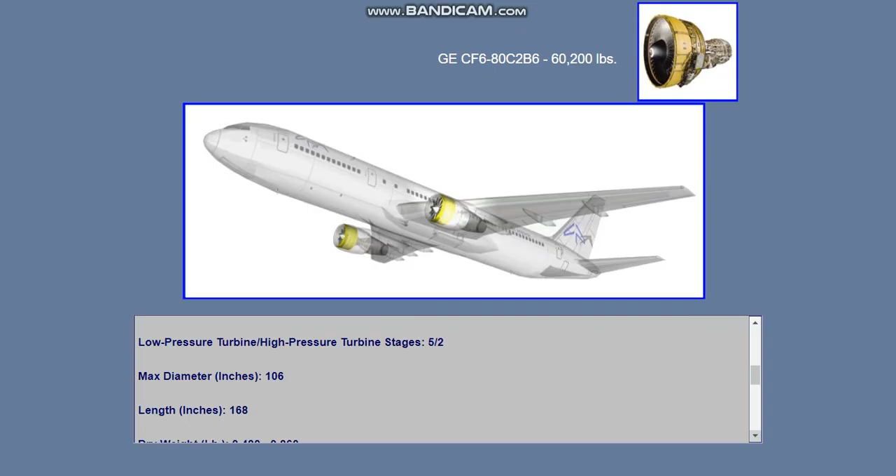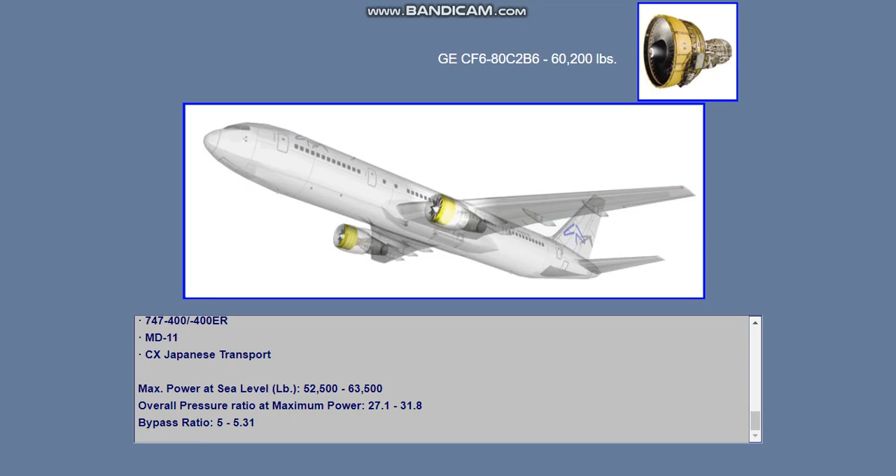The engines are dual-rotor axial flow turbofans of high compression and bypass ratio. The rotor assemblies, N1 and N2, are mounted on concentric shafts. The N1 consists of the fan and a low-pressure compressor and turbine section on a common shaft. The N2 consists of the high-pressure compressor and turbine section on a common shaft.

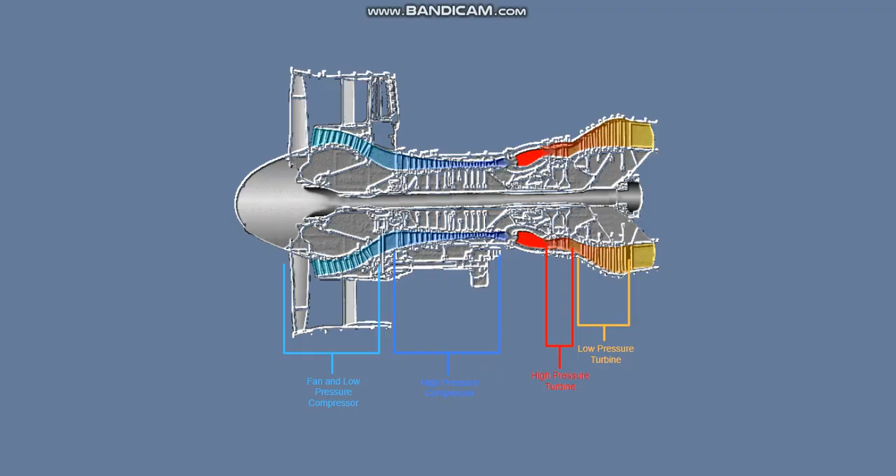The N1 and N2 rotors are mechanically independent. The N2 rotor drives the engine accessories and is mechanically connected to the accessory drive. Therefore, the pneumatic starter is connected to the N2.

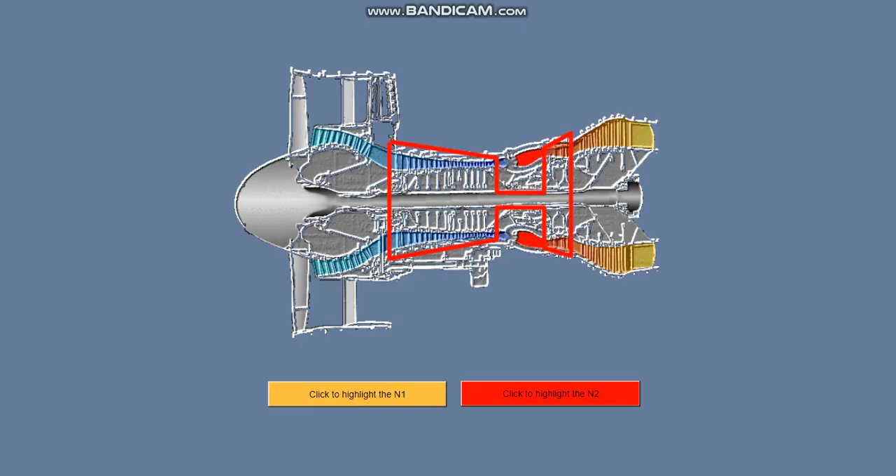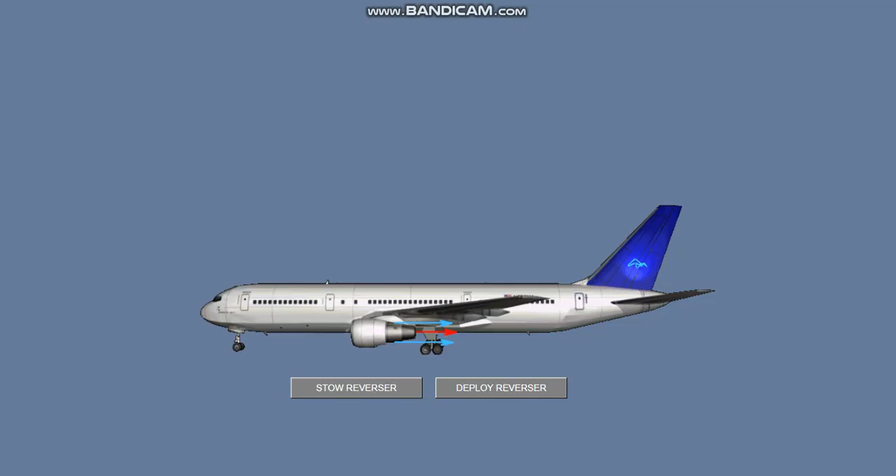Each engine is equipped with a pneumatically operated thrust reverser. The thrust reversers are used to reverse the fan airflow during ground operation to aid in deceleration.

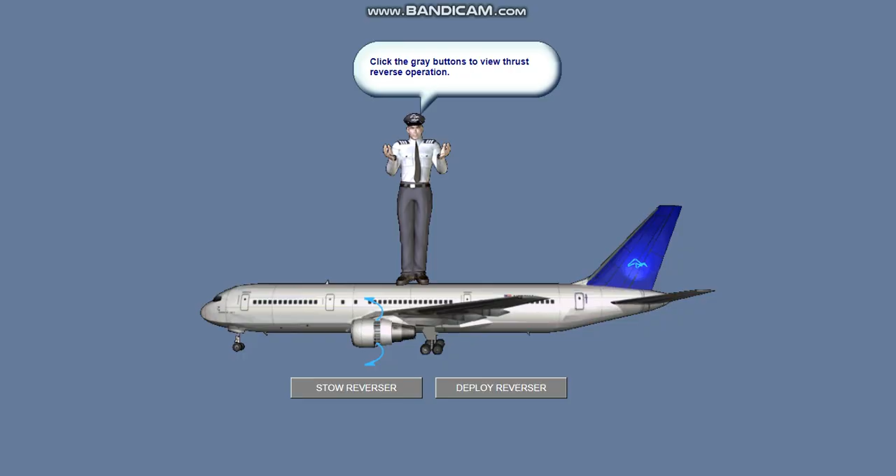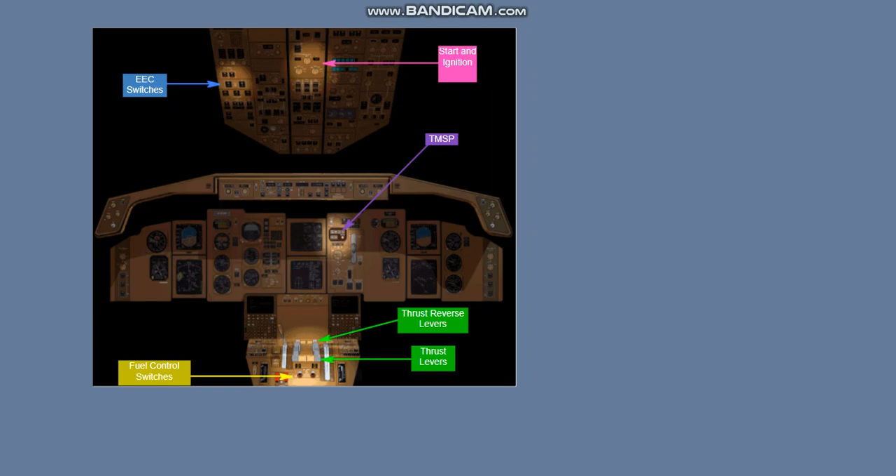The flight deck controls associated with the engines are shown here. We'll provide an overview of these controls on the following frames, but more specific information is provided in other CBT modules.

The fuel control switches are moved to run during engine start and are moved to cut off when the pilot shuts down the engine. Each fuel control switch has a red light that will illuminate if an engine fire is detected. Amber lights above these switches provide indication of the fuel valves on each engine.

The thrust levers are moved to select a thrust level. The thrust levers are normally positioned by the auto throttles, but can be manually positioned by the pilot at any time. With the thrust levers in the idle position, the thrust reverse levers may be raised by the pilot to deploy the thrust reversers when the aircraft is on the ground.

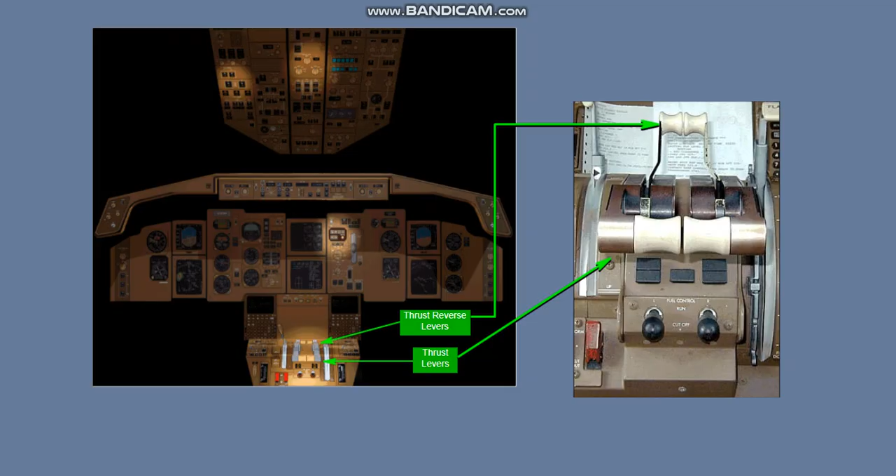The Thrust Mode Select Panel, or TMSP, may be used to manually select the maximum thrust reference mode for various flight conditions. It can also be used to select reduced thrust levels. However, the thrust reference modes are normally provided by the FMS. Note, the TMSP is not often used on some aircraft, as thrust mode selections are automatically performed by AFDS mode changes, so that pressing buttons on the TMSP is not necessary.

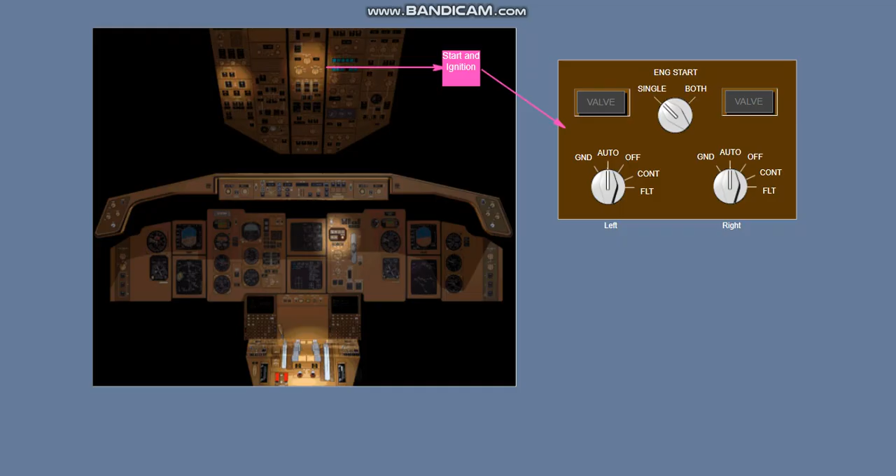The start and ignition panel has 3 knobs and 2 lights. There is one start switch for each engine. The available switch positions provide various levels of ignition operation, and the ground position provides engine starter control. The ignition selector is used to select single or dual ignition for both engines. The valve lights illuminate when the engine start valve is in transit or is not in the commanded position.

Each engine is controlled by an electronic engine control, or EEC, sometimes called a FADEC. The EECs monitor thrust lever position and then set commanded thrust. The EECs also provide protection from exceeding maximum thrust limits. The EECs are required for engine operation and are self-powered when the engine is running. If an EEC fails, the engine will shut down.

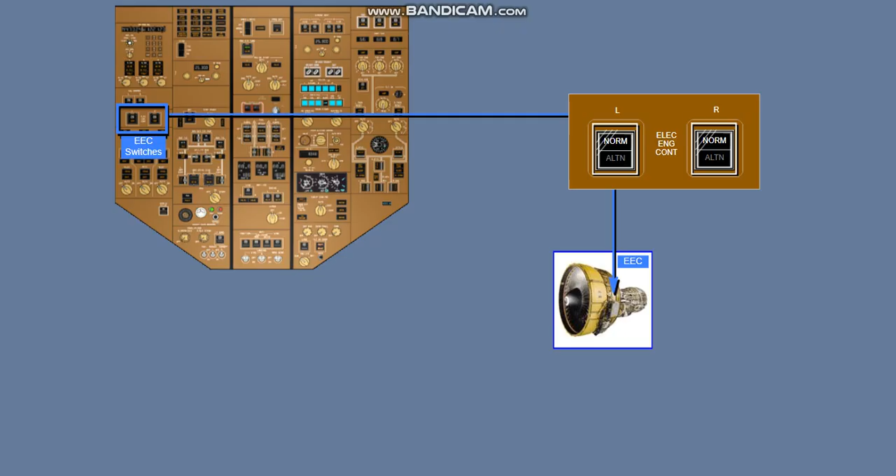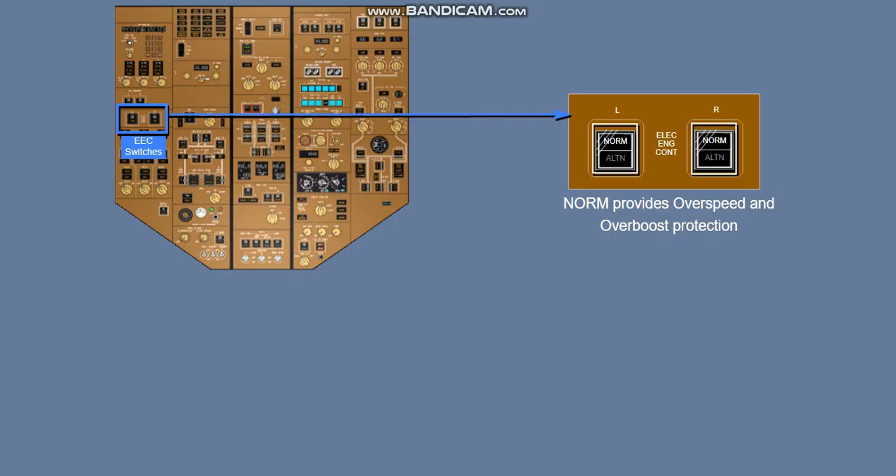The electronic engine control switches are normally in the NORM position. Pressing a switch will select the engine EEC to the alternate mode.

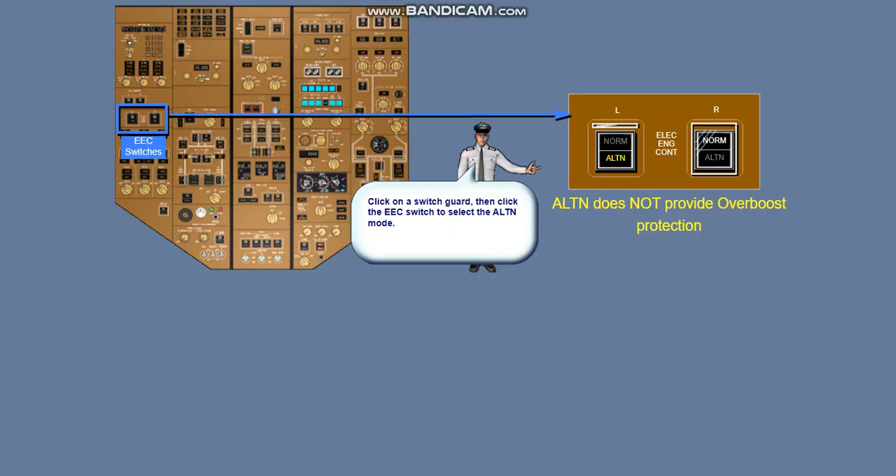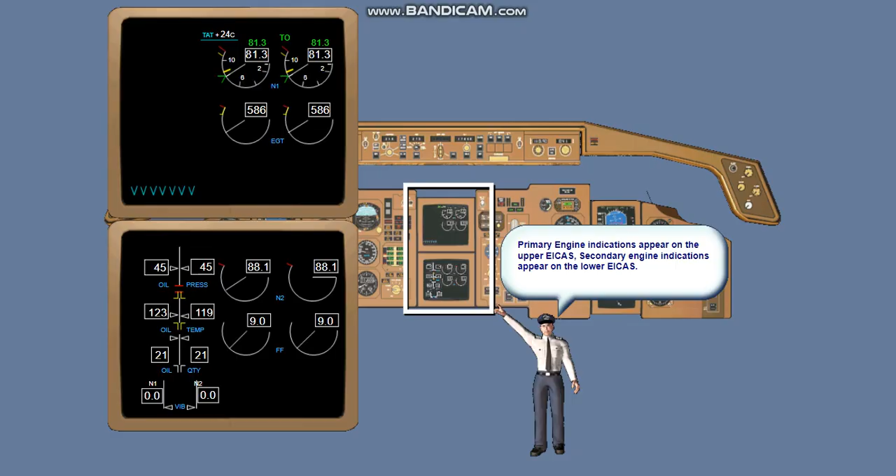Engine indications are normally displayed on the two EICAS displays, which are available when normal power is on the aircraft. The primary engine indications display on the upper screen and are always displayed. The lower screen can be blanked, or can display aircraft status, or can display the secondary engine indications. Here we show the secondary engine indications.

Some indications are provided with moving dial pointers and boxed digital readouts. Other indications display with a vertical scale, moving pointers, and boxed digital readouts. We'll learn more about these in the Controls and Indicators module.

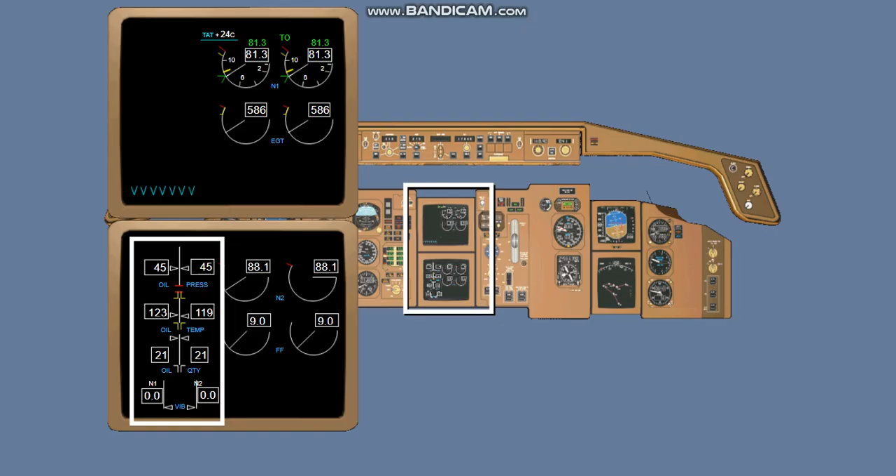The Standby Engine Indicator, or SEI, is normally blank, but will automatically display data when both EICAS displays are failed. This indicator provides indications that would be especially valuable after a dual engine failure, since the EICAS will blank when normal power has failed. Now, let's answer some questions about what we have learned in this module.